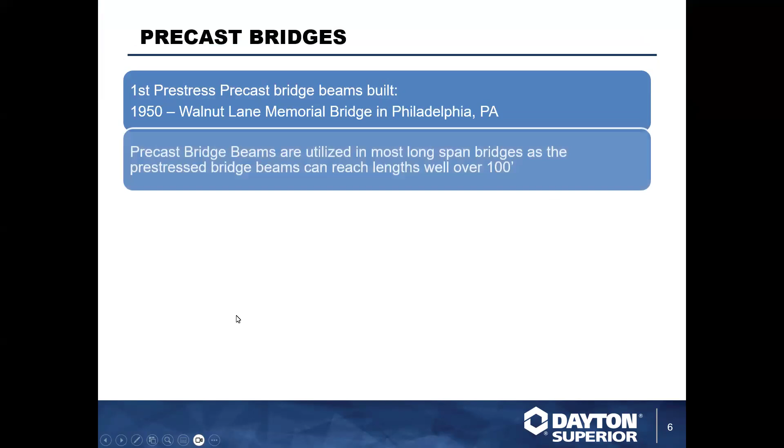So today we're going to talk a little bit about precast hanger solutions for precast beams. So when we're talking precast girders, we're looking at those girders that are typically cast in a shop, transported to the job site, and the bridge is then erected from that.

Now, the first pre-stressed precast bridge beam was actually built in 1950 over in Philadelphia. Bridge beams have been precast for well the better part of 75 years now. Lengths typical, well over 100 feet.

And you're going to see in the next statement here, the longest pre-stressed bridge beam was 223 feet, and that was actually up in Tacoma, Washington. It was produced by Concrete Technology Corporation, and that beam itself weighed 240,000 pounds.

But typical I-beam construction here, you're usually looking at typical standard I-beam, box beam configurations. You're looking at anything from short box beams, 40 feet, all the way up to about 100, 120 feet, which are standard in today's marketplace.

And obviously with this job up in Tacoma just a couple of years ago, you're talking, this is a pretty monumental step, 223 feet on an actual bridge beam.

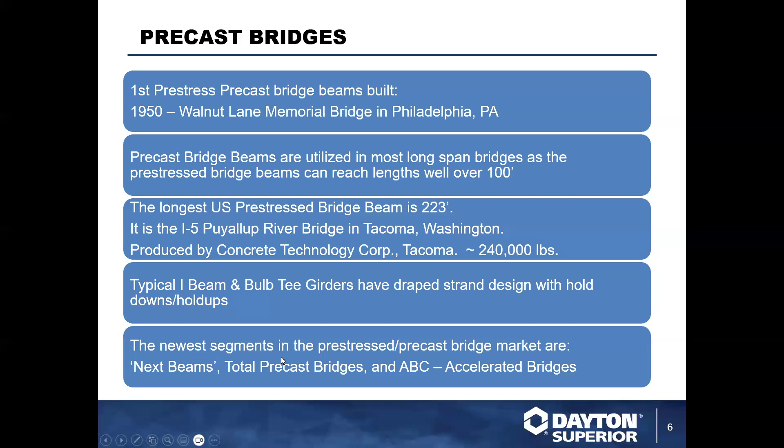So what we're talking about: AASHTO box beams, typical, looks just like a box, and we'll have details of what these are here. I-beams, we have bulb tees, we actually have segmental bridge segments, which are typically cantilevered. We're going to talk a little bit about some of the next beams. You can do a curved beam, solid rectangular beams, box culverts, and arch bridges.

Now, a lot of these projects, a lot of these types of beams, you may not have in your region. But believe me, if you work nationwide, you will find all of these different beams across the country in different segments, depending on what type of bridge structure is actually going on.

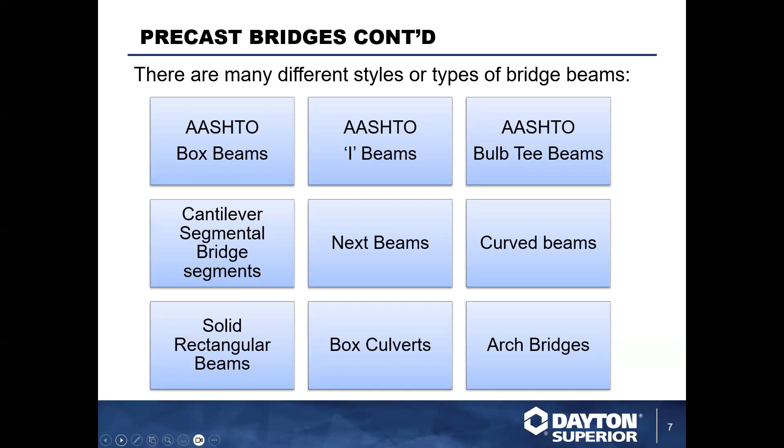So parametric sections, what we're talking about when we're talking about a precast beam, could be something similar to the precast I-beam, the deck bulb, the bulb T girder, or a Nebraska NU girder. These are all just a little bit of variation of the standard AASHTO type girders that we've typically seen over the years. You've got the TxDOT U, the tub girders, the Washington DOT tub girder. You've got box beams, you've got voided slabs.

Double T's - there's 3 different types of double T's being used in the bridge market industry now. And now we also have what we call a ribbed girder bridge, which is actually one of the next generation structures coming in. But you're also seeing deck slab beams, where pretty much the whole unit is basically brought in, set up, and then the joints are grouted and connected with rebar between the deck slab sections. Once you finish grouting, you have a finished product.

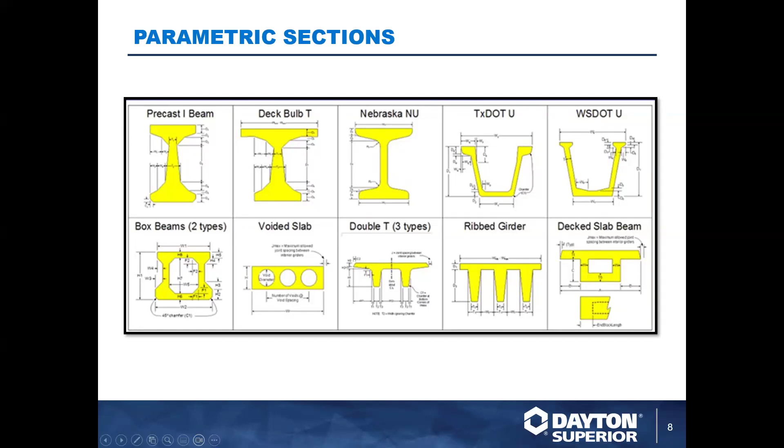So let's talk about box beams. Pretty much a pretty similar structure to what you see here. A lot of times they get post-tensioned after the fact. That keyway in between the girders actually, 9 times out of 10, is going to get grouted with a non-shrink grout, an 1107 type material.

Back when I was in upstate New York as a dealer, we used to do this as a subcontract. This is a standard box beam configuration, and you would actually fill this unit with non-shrink grout. They come back in and pre-stress or post-tension this bridge, and then pour a slab on top of it, or put an asphalt overlay on top.

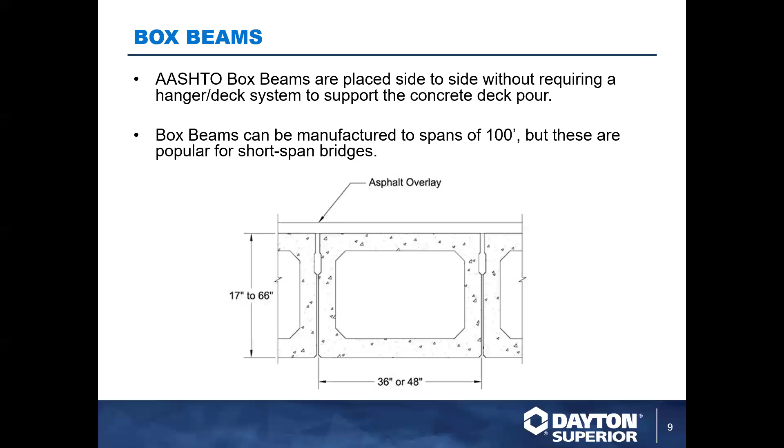Double box beams, typically you see on a lot of smaller bridges that don't have an exorbitant amount of traffic on it. You will see these go into place here. They're typically shorter, 18 to 24 inches in depth. So you're looking at configurations with overhang brackets and hangers, or maybe even no hangers involved with it, where they're going to put just an asphalt overlay over the top.

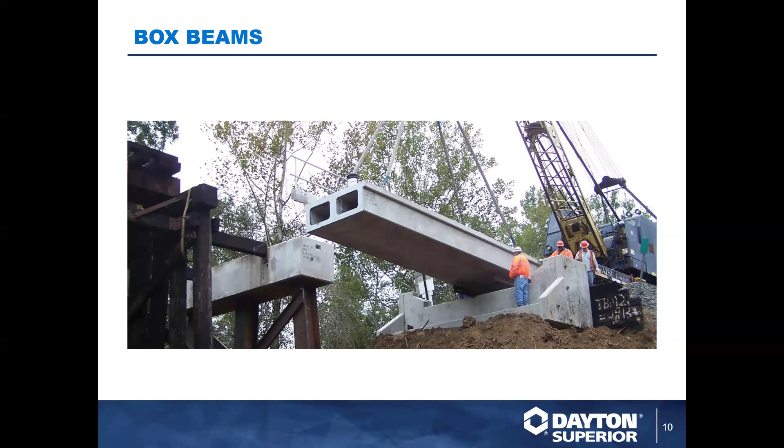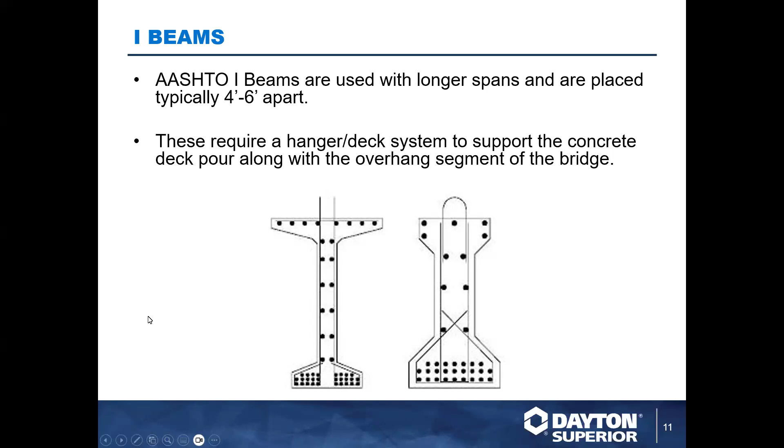These are changing also, and the big thing that you want to look at with this is, you see all those black dots - those are pre-stressed strands. So typically you do not want to drill into the top of these girders without any care or consideration that you may hit one of those strands. If you hit one of those strands, you could do basically a bunch of damage to the girder itself, including worrying about failure with it.

So when we're talking I-beams, here's what we're looking at. These are typical structures going in. They sit on top of a pier. They run typically pier to pier or pier to abutment. They sit on top, and you actually have a deck that's actually going to be formed up on top of it. The deck typically can be a removable wood form, or it can be an SIP decking or a concrete plank put in place here.

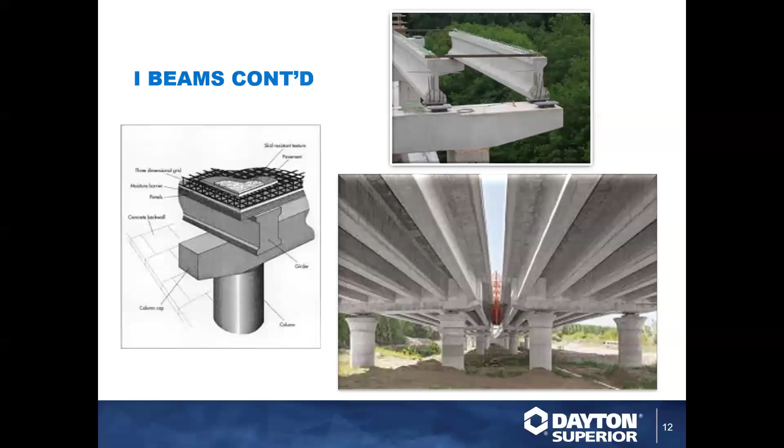And the only thing that is actually poured on top of these, a lot of times, is the deck with the overhang. Everything else, forming wise, unfortunately has gone by the wayside on a lot of these jobs with the introduction of concrete plank and SIP decking. We're taking a lot of the removable wood forming out of the picture.

Bulb T girders typically have a bigger top flange than they do bottom flange. This gives them a much bigger, broader area to cover, so that you basically are having less unsupported concrete, or excuse me, less unsupported formwork, on the top of the deck. It also helps them with spans, clear spans from basically an abutment to a pier, etc. So these girders are typically longer spans, typically spaced 4 to 6 foot apart.

Beams typically have a wider top flange, as I talked about, and thinner webs, so typically with concrete girders you don't have to worry about any deflection from the girder unless you get a little bit of rolling with the girder, which is something that typically you take care of with the diaphragms being put in place. You'll find diaphragms running on the interior from girder to girder, typically spaced anywhere from 25 to 40 feet on center.

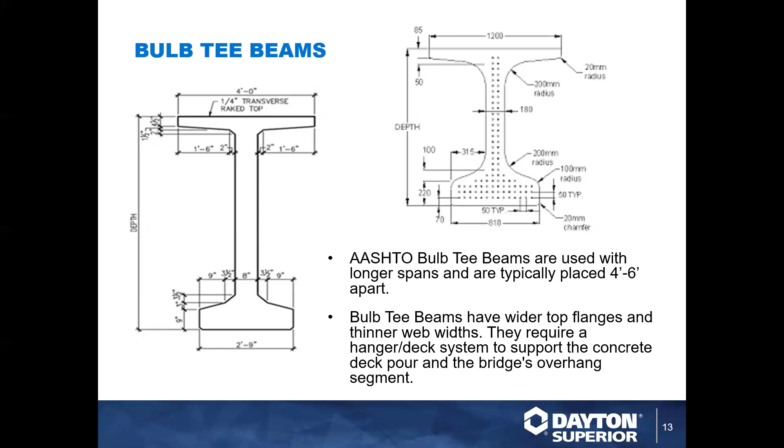Here's bulb T's in place here. You can see how they're set up here. Now, they will actually have some diaphragms running from girder to girder to give themselves some lateral support so they don't roll on the project.

Typically, most of the jobs today use structural steel. Some jobs still require you to do concrete work, which is actually good because that gives us a lot of additional items we can pursue with a cast in place diaphragm.

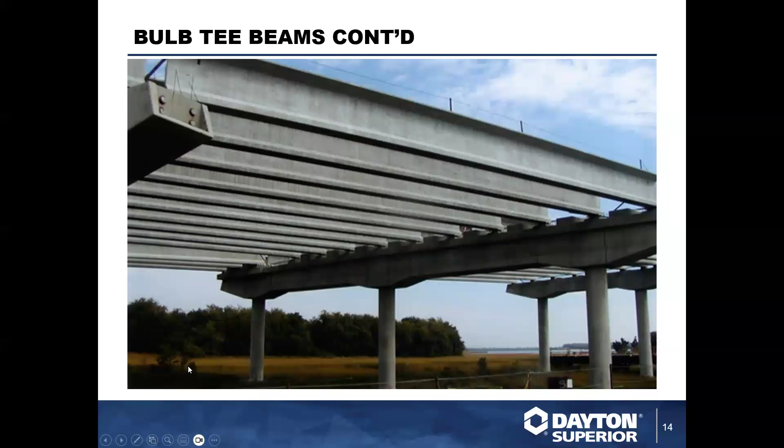So here are the beams. You can see how they have a much wider top on them. Typically, these beams are going to have a lot of times the hangers already cast in place.

Now, if you are a dealer looking at how you would approach this job, you find a job that's bidding for this project, this municipality. You track the project through, see who the low bidder was. Contact the contractor to find out who was providing the hangers for the girder, because you need to do this early on in the project, since if it's a precaster, a lot of times precasters will cast these beams, put them in their yard and let them set until they're ready to be used. So you need to get out early on these jobs.

Hangers are typically supplied one of three fashions. One, either the precaster is supplying them. Two, a dealer is going to sell them to the precaster or supply them to the contractor to put them in place. The third way is the contractor will actually supply them to the precaster themselves. So find out how they're actually being supplied to the precaster so you can pursue that avenue to make that sale.

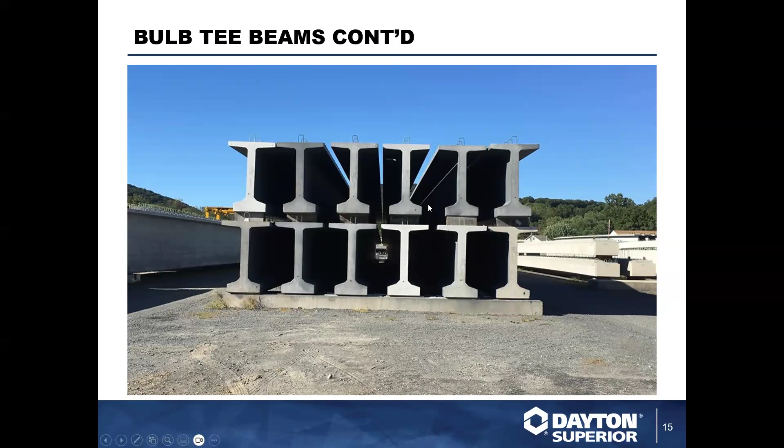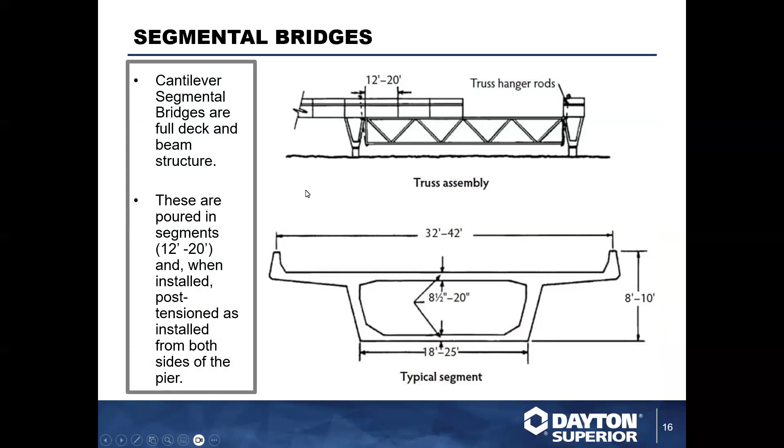Segmental bridges, typically what you're looking at with segmental, we see a lot of these bridges popping up now. It seems that a lot of the different structures are coming in with a center cantilever segmental, which basically is something where they're shipped out in smaller pieces, typically precast, about 12 to 20 foot in width, and that's going to be picked up and post-tensioned back into the structure, one from each side, so that it can balance the cantilever.

And with this type of structure, you're not seeing a whole lot of overhang being formed up on here. The deck is actually pretty much self-contained. So once it's closed up, other than maybe a wearing surface on top of it, there isn't a whole lot for these jobs. The segments are post-tensioned, and they have a special adhesive in the joints that actually bond these structures together.

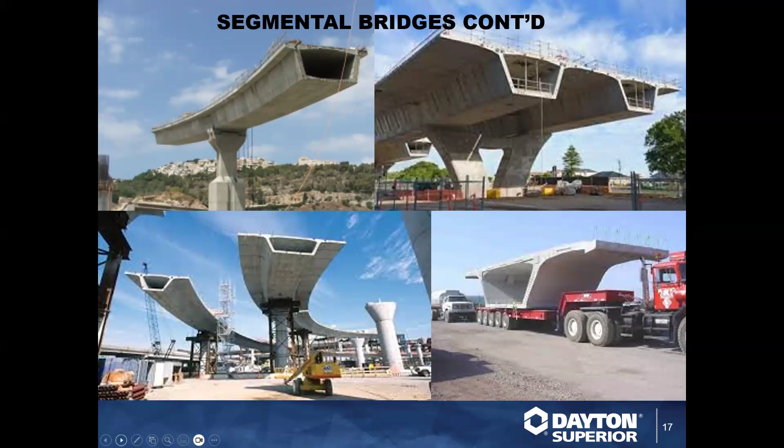NEXT beam configurations. This is what's happening right now. We've got double T's, the shapes. Once again, with these next beam generations, a lot of these bridge beams here, you're basically having a wearing surface right on top of the girder. You may have a waterproof membrane that goes down and then asphalt over the top of it.

But this is something where the beams with the deck sections are already cast in place and put in place. This kind of reminds you a little bit of a double T for a parking structure, and how they would actually construct a parking garage. They're doing some of this type of work now with bridge work as we speak. So we're seeing more and more of this being done, a lot more so in the Northeast right now. That seems to be the trial and error place of the next generation.

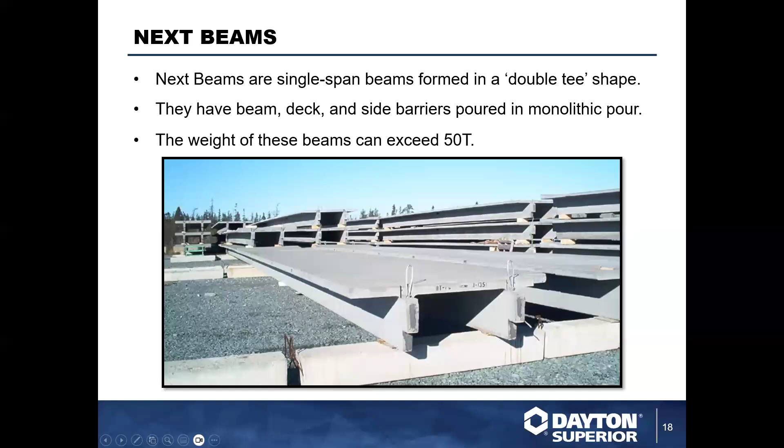Some of the next beams, as I talked about, the deck is actually complete here. What they're going to do is come back and grout the keyway here. They're going to connect these units from point A to point B across the units with a threaded coupler, and at that point you've got a monolithic component. They're going to come in and pour the joints here, and a lot of times, because of the lifting hardware and everything in there, they will put a waterproof membrane down on top of this with an asphalt coating on top.

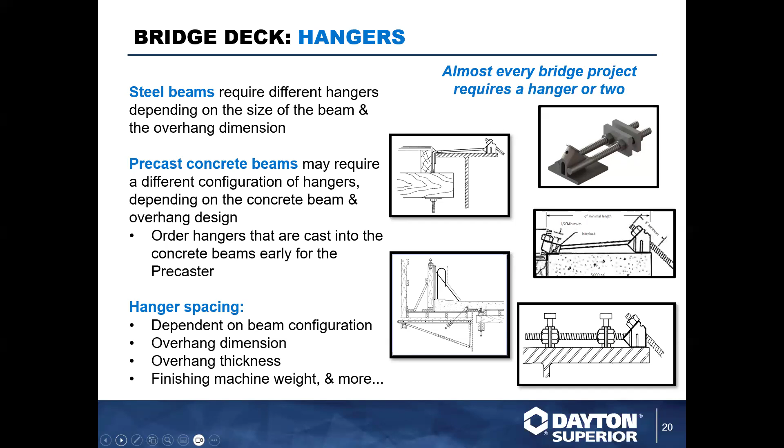I recommend on anything with a concrete beam that's 3 inches or less, usually in a bulb T, I would put the plate on it just for safety.

Here's that half hanger I talk about when I talk about C24. The 1 PR and the 4 PR are all typically denoted as a precast hanger. Type 1 is 3,000, type 4 is 6,000.

It's a 6x4x2 precast hanger, 90-degree. Now you can get the same hanger with a 45-degree on it, and that would be a C24 4A PR, A meaning angle. You can get those also in a 6,000 and 3,000 pound load rating.

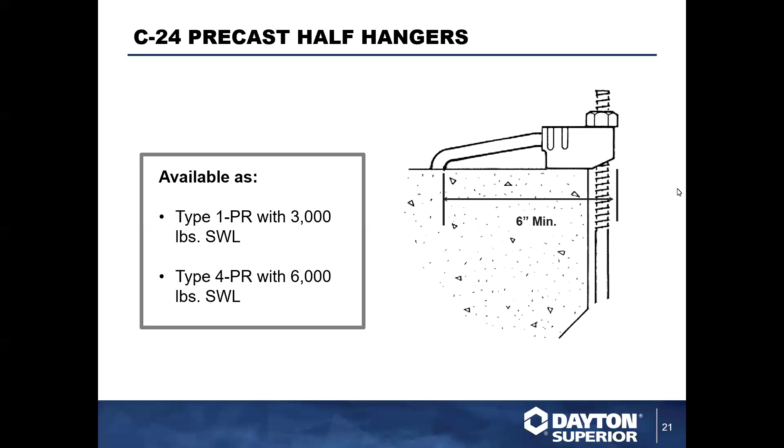Here's a 4A PR, this one here, and we can adjust. You'll see in the book we have the 4A PR and a 6x4x2. Those are minimum dimensions. We can actually adjust any of these hangers to accommodate whatever we have here.

In Texas, for example, we have select hangers already designed for what type of Texas DOT girder they have. Based on the flange width, we supply either an 18-inch or a 21-inch, depending. What that typically does is take that hanger anchorage back in towards the center of the girder, where it has a little bit more meat to actually hold on to.

So this actually is a great option for more jobs than you'd think. Don't look at the 6x4x2 and think you're limited to that. We can actually accommodate any of those dimensions here.

And another thing is, all of these hangers are typically manufactured at Dayton Superior because they are MTO. They all meet DOT requirements as far as being domestic material, because they are made with domestic steel and made here in the US.

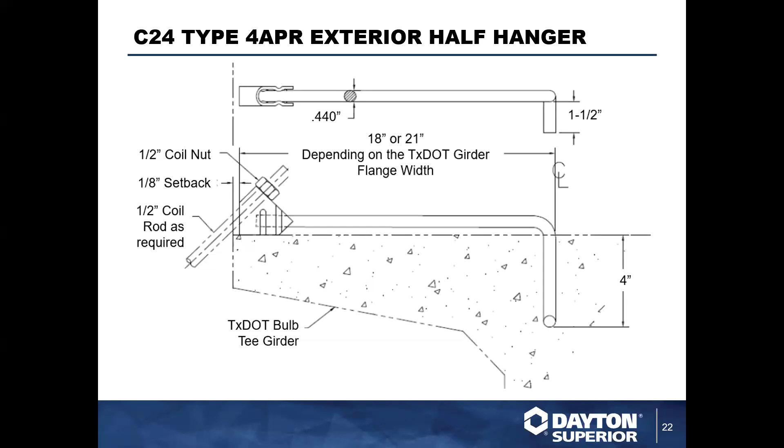And they are MTO, unfortunately. Most hangers all are, because there's so many hanger sizes out there that you just couldn't stock everything. The C25 type 1,

Back when I was a dealer, we used to refer to this as the 'oh shit' hanger, because that was the first thing that came out of the contractor's mouth when he realized he didn't have a hanger in place where he needed it. So this would be like an emergency fill-in, and we would also supply this with a 45-degree also, it can be. So it'd be a C25A.

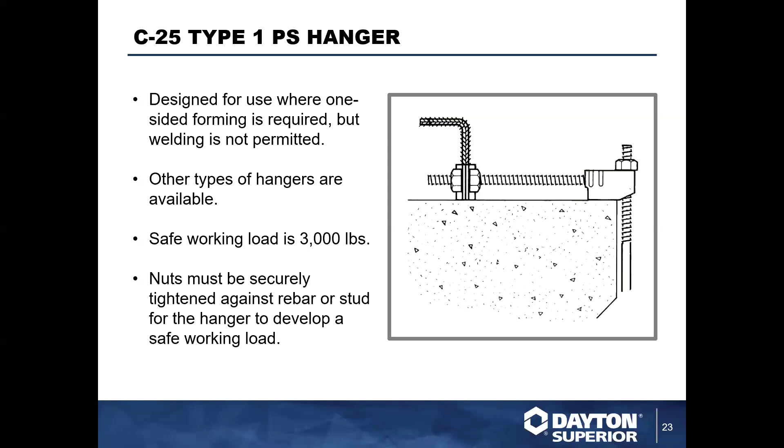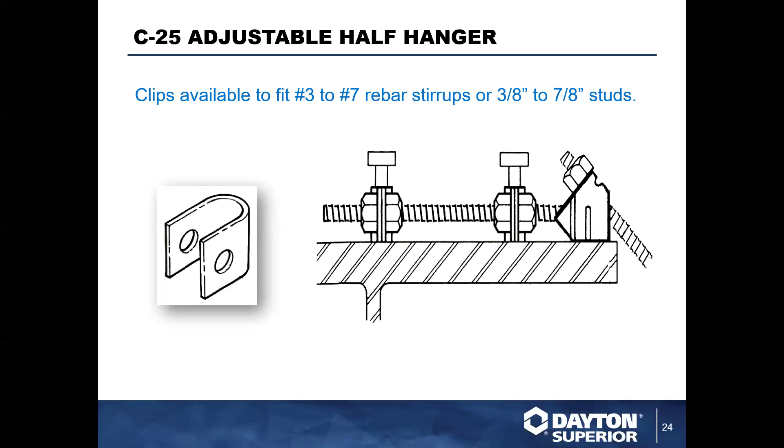And you can get it like this with 2 clips on it to get yourself a 6,000 pound load rating. This is a great option for anybody if you're doing a lot of bridge work, to keep maybe 10 or 15 in your rental, or in your warehouse, just in case, because every once in a while you'll get that call where the hanger either got destroyed in shipment or transit, or when they were erecting and they need another hanger to fill in. This is a good option for that as a fill-in for most of these hangers.

Now, it doesn't mean that you can't use any of the other hangers when you have to do interior wall forming. The only hangers that typically you cannot use with a concrete girder are going to be your wraparounds, which are going to wrap around the top beam flanges, because you can't just wrap around a concrete beam flange. Or a weld-on, because you can't weld to the girder.

Now, there are some hangers, the half hangers, that can have welding studs put on, in place where you can weld them to the rebar or whatever. But contact your Dayton Superior representative, he can actually help you through this. You have a wide array of whether you want 90 degree, or 90, 45. You need it to tie back to hold down the hanger, especially if you're putting it on a finishing machine out on the overhang bracket, so you can actually have that tie back into it.

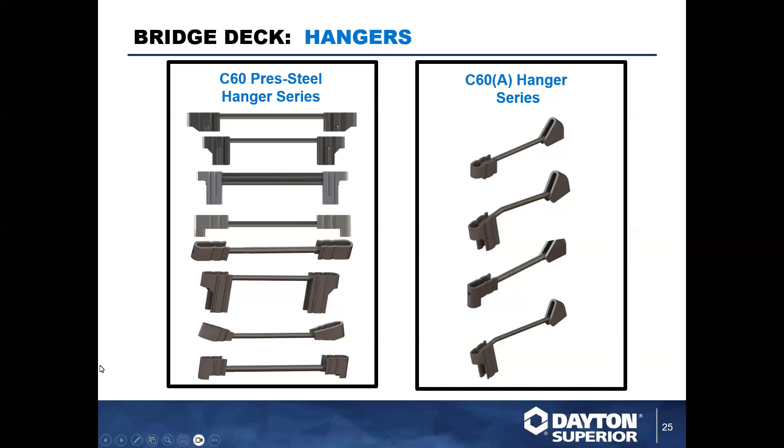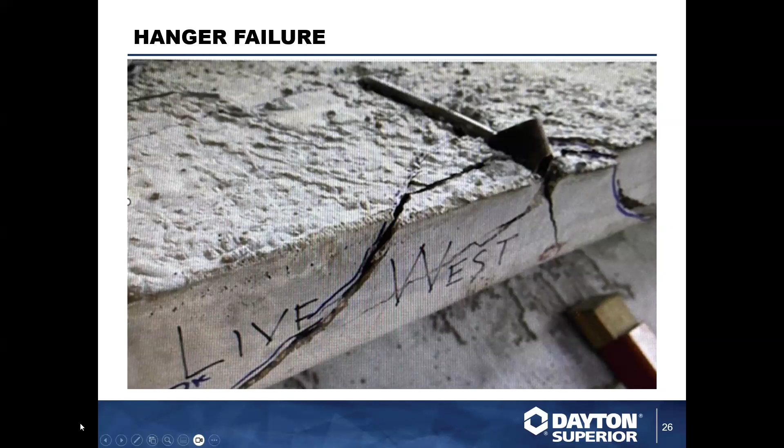And any of the hangers with the overhang brackets, use the standard C49, C49D, or the C49S, the field modified. And to modify a C49 to get to a C49S, you just take out the vertical pipes and replace both pipes with just the outside pipe in place. Remove the inside pipe completely, and that gives you the adjustment up from 30 to 50 inches. Actually, it'll take it down to 14 to 26 inches on adjustment in that vertical range.

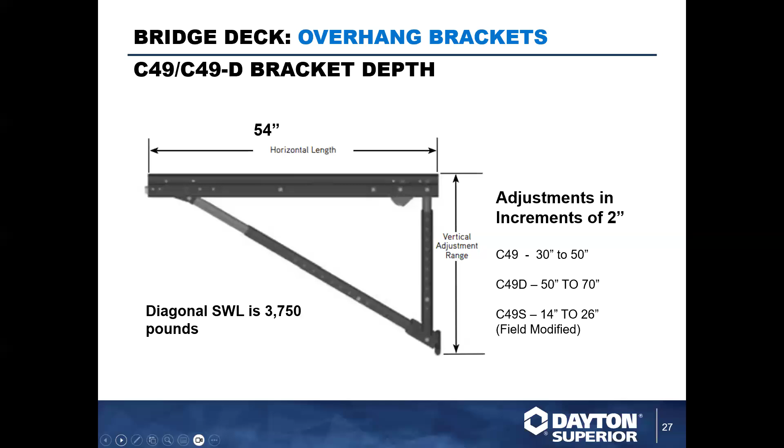Any of the accessories that you're still going to need are going to be the same things. You've got the coil bolts, adjustable coil bolt, half inch by 24-inch adjustable. You've got your wall plate adapters if you wanted to decide to have an insert cast in the precast girder. You also have guardrail receptacle and extenders that are also available.